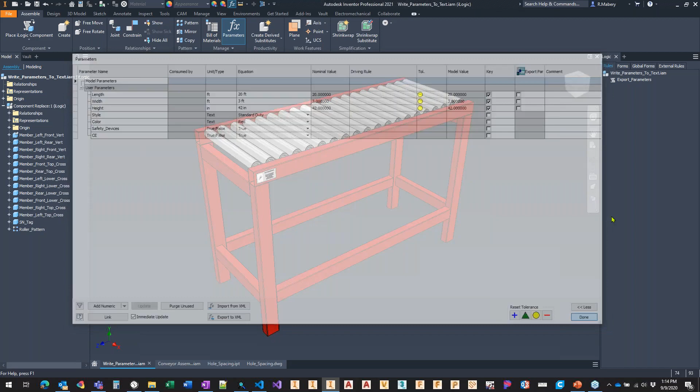So again, we made this very generic so it could work with just about any assembly. If I only want to look at key parameters, there's a way we can put a check in here for key parameters. I should have pointed it out while I was in the parameters dialog box - notice there's some of these that are marked as key.

It's a good way of filtering out your parameters dialog box so I can see one thing or another. It's also very handy to mark my parameters key that I'm going to end up putting on the UI or on the form. The forms editor inside of iLogic, I can easily say just show me the key parameters and drag and drop those onto my form.

So this will be a very quick check right here. I'm going to say for each user parameters in OUserParams, we just need to look at the is key. Again, I'm looping through each one, so I'm going to look at the is key property.

This is a property, it's a Boolean. It's either going to come back true or false. So what I'm saying here is if that is marked as true, then go ahead and write it out. If not, it's just going to skip it and move on to the next guy.

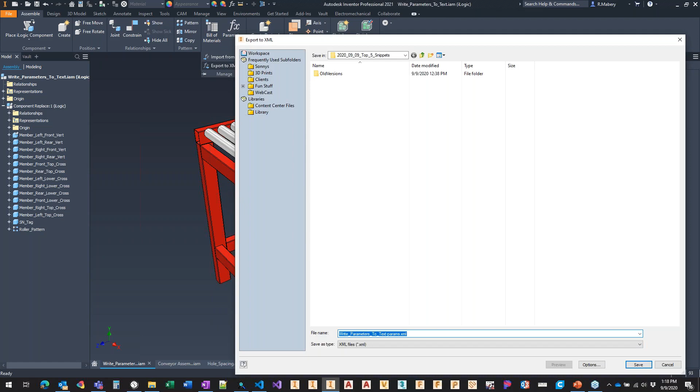In the past, I've used this to export parameters and then copy those or load them into some other assembly. If I was manually going to do this, I would simply give it a file name, and then we have some options here for whether or not I want to export all parameters or just my key parameters.

Then I would go over to my new assembly and choose the import, pick the XML file, and then all of those parameters and their equations would come along with that.

Okay, so I'm going to start a rule here called export XML. We can also do that with code.

This is on my system tab in my parameters category. Down here at the bottom, there's a load XML and a save XML. I'm gonna go ahead and enter both of those into my rules editor so we can look at what they're doing. They both look very similar, right? The only difference is the method that it's calling here. This top one is doing a save and the bottom one's doing a load.

So I'm going to export my parameters first. I'm not going to worry about that guy. I'm going to put a piece of code here in the front of this that's just getting out that document name, that file name, and then concatenate an XML with it. I'm doing a string dot concat against it as opposed to the ampersand. And then I want to export the name in this case.

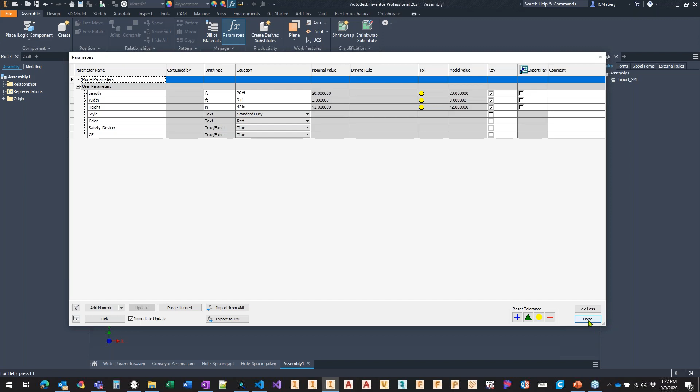In addition, there is an is-keys-only argument that we can add to this. If I go back to my parameters category, there is a save XML keys only, and I'm going to put this right above that guy. So really, the only difference is this keys only argument at the back end.

If I hover over that function, that method against that, I can see again what arguments are required. There's the doc, a file name as a string, and then there's an optional save options, right? And that's what that keys only is doing. So just like we saw before, where I was checking the is key property for each parameter, that keys only allows me to export just the key parameters.

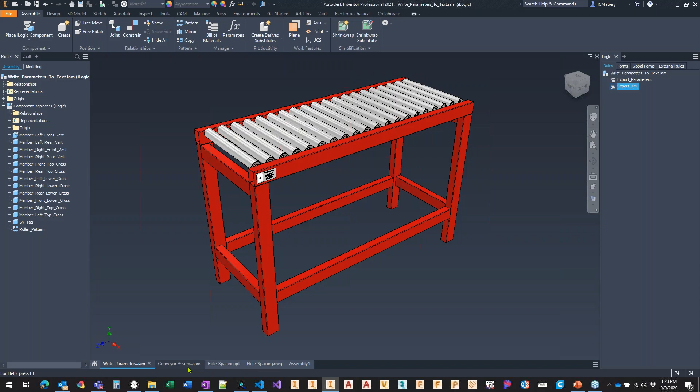So let's look at using the measure snippets. I'm going to measure some distance between multiple entities. If you've seen any of my iLogic webcasts, this is probably familiar to you.

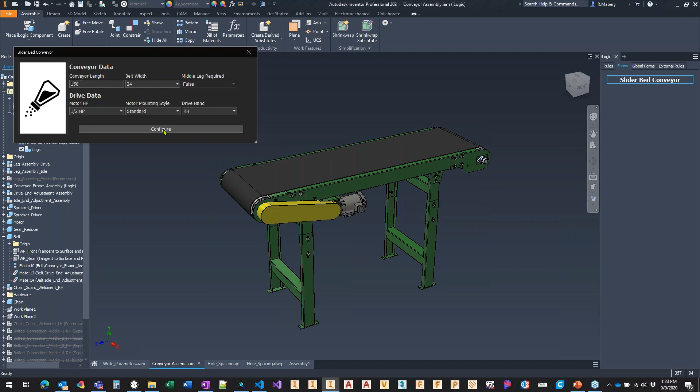I use this slider bed conveyor quite often. I've got a parameter inside here called maximum leg span, and as a designer, I know that if my legs get to be so far apart from each other, I need an additional center leg. If I switch my conveyor length here to 150 and hit configure, it turns on that middle leg. That's a wonderful thing about iLogic, I can capture that tribal knowledge, things I know has to happen, put it inside there and let it worry about doing that.

Okay, so I'm gonna go back to 85 real quick here, and we'll see that middle leg get turned off.

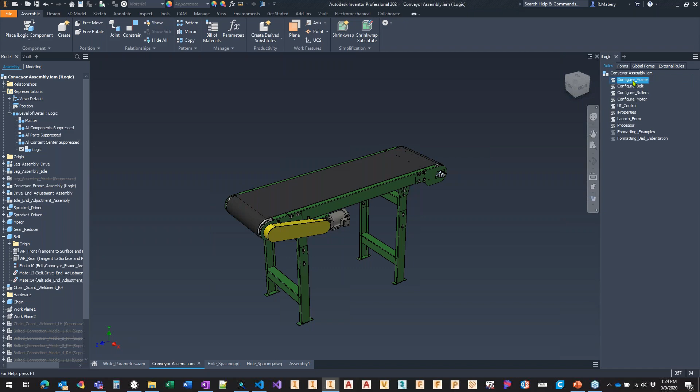I'm gonna jump into my rules here and look at my configure frame rule. Right down here on this line is where we're calculating that leg span. I'm doing some math there to say this is what the leg span is: my overall length minus the end roller offsets minus the mounting drive offsets.

That works, but let's look at doing another way of solving that, another solution for this. We'll use the measure minimum distance snippet. So right now I want to comment out that leg span.

And then in my measure category, I've got a minimum distance and a minimum distance within components. Quite often, a lot of these snippets, you'll have component versions, you'll have assembly versions, and that really generally means another argument that allows me to tell it I need to find an entity in a specific component. Since I want to look at the brackets that those legs are attached to, it's not something at the top level, it's something down at the lower levels.

So I'm going to copy my leg span value there, and it's going to measure the minimum distance between, again, here's my component 1, and what's the entity inside there? My component 2 and the entity inside there.

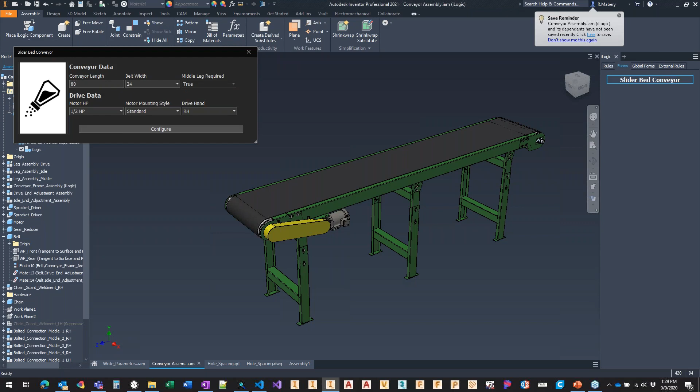So now let's pop back open my form. I'll go to 80, hit configure there, and my middle leg does work as I expect it to, because the model is updating before it takes the measure distance.

If you have a large configurator, if you're doing a lot of work, updating it may not be your best option. You may want to make sure that your code, where you're taking that measurement, is in a good spot relative to where I'm doing my modifications.

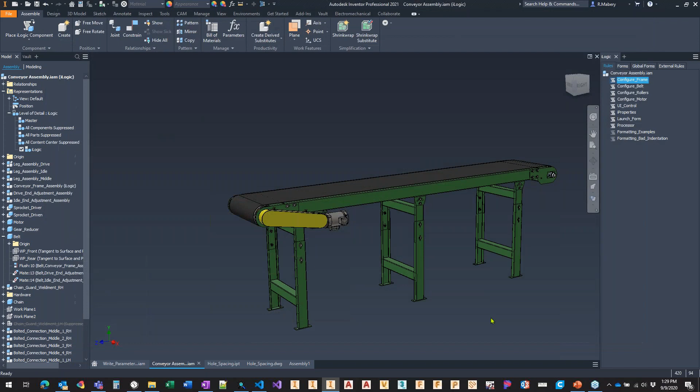Okay, so let's go ahead and close that guy. The next ones I want to talk about are running other rules with an argument map. Let me pop open a rule here, and I'm going to call it hole spacing.

In my run other category, we have this run rule snippet. It allows me to, at that point in time, go run another rule.

We also have this run rule with map. What that allows me to do is pass arguments to some other rule. That way I can build modularized rules, or rules that do one specific thing. I can pass them values, much like a function or a subroutine, and allow them to do what they need to do. And then if it's a function, I can have it return values back to me.

So this is the run rule with map snippet. All it's doing there is creating a name value map, and it's adding one simple argument. It's called argument one, and then they're giving it a value. And then it does exactly just that run rule, right? That's what we've probably used in the past, just the iLogic VB.run rule with just the name. But here we have this additional argument of that map.

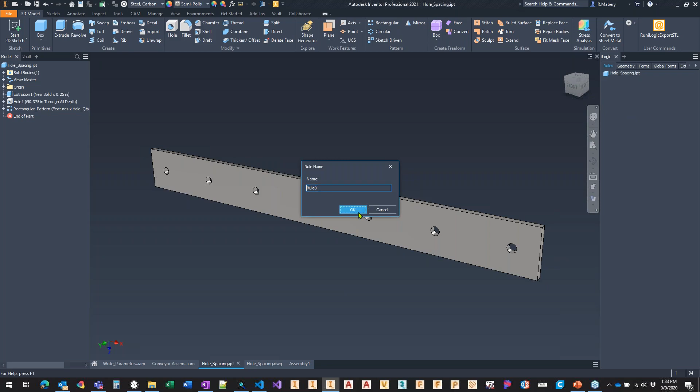So let's look at what we need to create that first. Again, I'm making a rule here. Oh, hit the wrong one. I want the run rule with map. I'm going to replace some of that. Again, with stuff I've already got typed out, just so you don't see me typing here.

It's doing the same thing here. I'm calling it rule arguments as opposed to map. And then I'm adding an argument called OAL, overall length, and that's simply doing a calculation of the length minus my end offset times 2. That's giving me that whole span.

And then I'm also passing along the maximum spacing parameter, so I'm adding an argument called max spacing and giving the max spacing parameter.

Then I need to go call that rule. My notes here have a little bit more comments than what the other one did. So here I'm doing a run external rule, running this calculate hole spacing, and again, passing it those values, passing it the OAL and passing it the max spacing.

I'm going to treat this one like a function. It's going to go out to that separate rule, the calculate hole spacing rule, is going to go run something, and then it's going to give me values back.

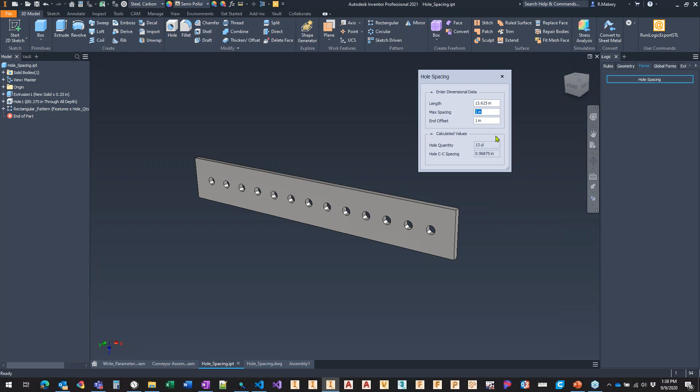Showing down here on the bottom what those guys work out to be. Okay, so again, taking the rule here and it's passing it down to the calculate hole spacing rule, and we can see that through the logger if we'd like.

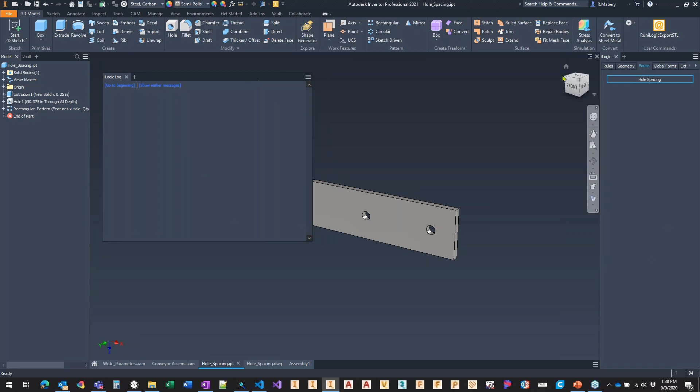Okay, I'm going to clear this thing for the time being, and I'm going to modify this length value, and then we can see what's going on. I do have detailed trace turned on, so we can see that we went into rule 0. The trigger for that was the length value because the length parameter got modified. Then it's entering the calculate hole spacing rule. It's doing some math, figuring out what it needs to do, and passing it back, and then I'm back in rule 0.

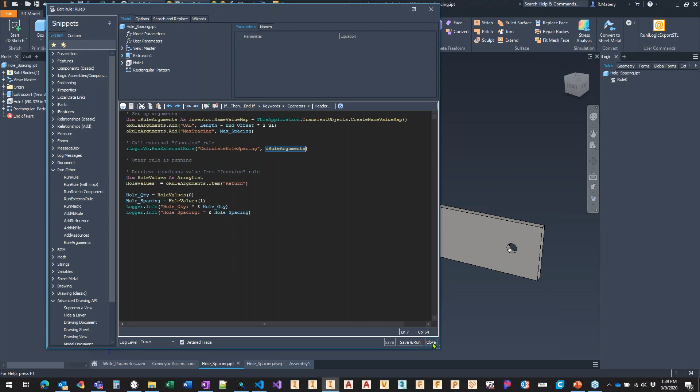Okay, so in this case, again, I'm replicating a function. It doesn't have to be—I just wouldn't be getting back a return value. I could simply be running another external rule to go do something, and then I don't have to worry about getting data back, but I'm still passing it some arguments. And again, the benefit to that is from any code anywhere, if I want to know what spacing could be used, I simply throw data at this thing, get back what I need, and go about my business.

The benefit to modularizing it is I'm not replicating that code all over the place. I don't have to write it again. If I need to make a modification to it, I'm going to one spot as opposed to multiples.

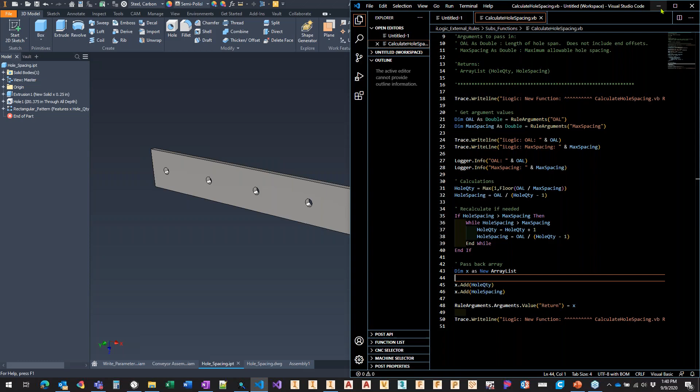Okay, so last here is getting model names and model parameters. So I've got a drawing here that is based on that hole spacing part we just talked about. There is some code in here already to set the view scale the way I want it. Let's look at adding center marks to each one of those holes.

If I jump back over real quick, this is a rectangular pattern based upon that hole. So yes, again, there's multiple ways I could be doing this. This is just one example of how I can get data from a model in my drawing and do something with that. Okay, so I'm going to add a rule here called center marks.

And we are in 2021 here, so the 2021 release gave us a new drawing category, a lot of new annotation stuff that wasn't available before. So if I double click the center mark, I'm declaring my first sheet, I'm declaring my first view, and then I'm getting some model intent. It's going to default to this hole edge. My intent inside of my part is called edge hole—it's the noun, it's an edge—and then where's it coming from? And then it's simply going to add a center mark to that.

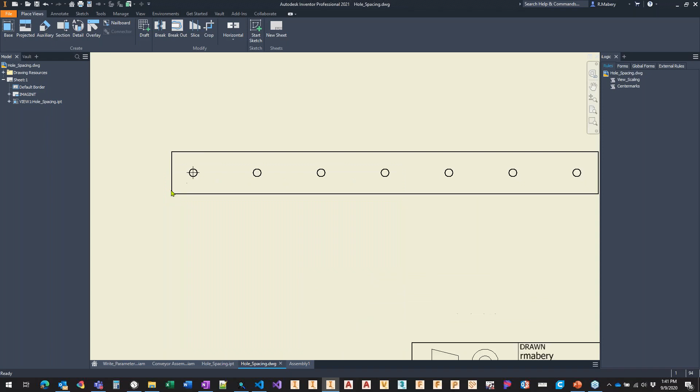Okay, I hit save and run, and again, we see that one center mark on there. If I go back to my hole spacing part and look at the geometry tab, there is that edge that's marked. So that is named geometry.

That's great for that first one, but what about all of the additional? Okay, so this is where I want to get out some data from my model. Something down at the very bottom here is this.

Advanced drawing API category. I've got model document, whether getting it from a view or getting the file name, whatever I end up needing to get from that. I'm going to choose the model document name, and that's going to get the full file name property of the model document, or the first model document. This happens to be the only one listed in here. If you had multiples, you'd have to worry about which one you're grabbing there. And it's going to store that value in this model name parameter.

Another snippet that's inside of there is get a model parameter, and that uses that model name argument that we just got to get out some parameter. In this case, I'm going to call this hole quantity, and that happens to be the parameter that's inside of that model - that's what we saw that other rule calculating. So now that I have that, I know how many hole quantities are in there, or how many holes are in there. So again, with our drawing snippets, we have intent on pattern face.

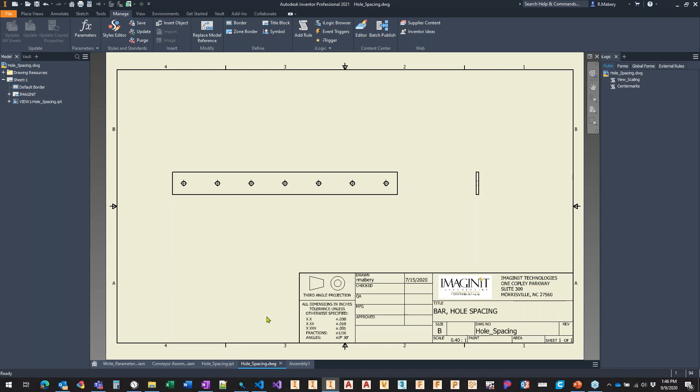More than likely, I would want that to be set up as an event trigger, right? So anytime I've opened that document or anytime there's a drawing view change, I want that rule to run. Okay, so let me jump back over to my part again. I'll make this guy 12.625 with an end offset of 5/8, and let's go max spacing of 4.

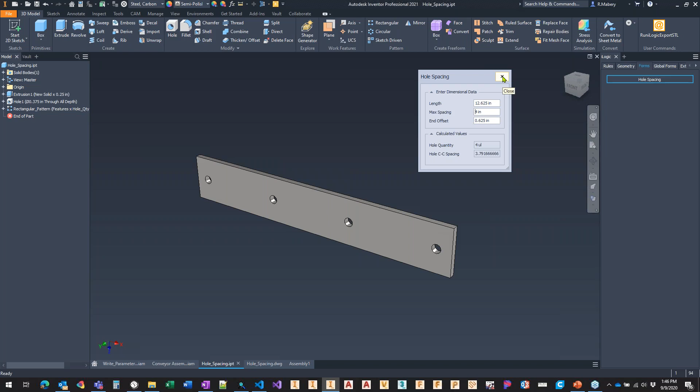Once I switch over to my hole spacing, again, that event trigger is going to fire off. It modified my view. For a second there, you might have seen those orphaned center marks, but then once the rule ran and managed those, it deleted them and then recreated new ones.

So let me go back in there and show that center marks rule again for a second. Okay, so that's it. Again, we went through some out-of-the-box snippets and did a little customization to them.

We exported parameters to text files. We exported parameters to XML files. We measured distance between entities, and then we used that to make a determination of whether or not components needed to be there. We ran other rules with arguments - I was passing arguments down to rules and returning arguments back to the original rules. And then in this case, we were getting that model name, so I can get inside there and get that parameter - in this case, the hole quantity parameter - but it could be just about anything that I wanted to, and then do some stuff against that.